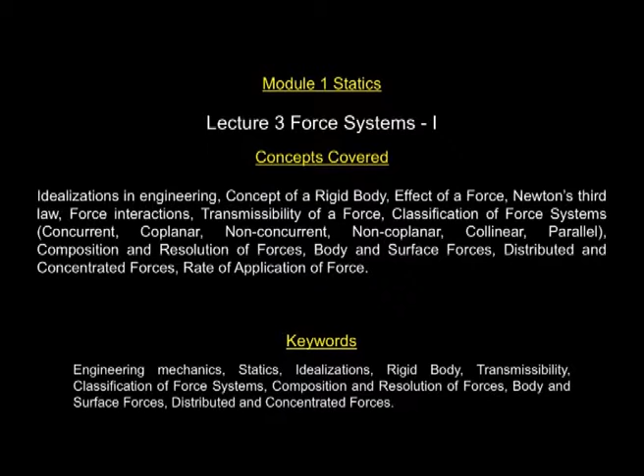So, let us get on to the main body of the course, and let me start with the first chapter on force systems.

Idealization is a crucial step in engineering approach for the purpose of analysis. Why do we do that? This is because actual behavior of systems are generally complex. Consideration of all features is difficult or impossible in many cases. So this is very important. You have to look at what is the phenomena you want to analyze. Depending on the context, you have to make an appropriate approximation.

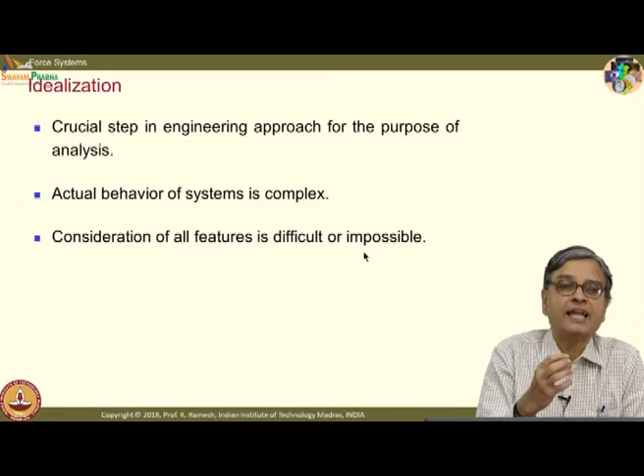So, when I have a physical system, I extract the essence of it by a mathematical model. And what is a mathematical model? We choose a mathematical model such that it is simple to analyze, yet exhibits the phenomena under consideration. So the challenge lies in how to arrive at a mathematical model for a given physical system, and how are you sure that whatever mathematical model I have taken is good enough for the given application?

The only way is you verify it based on experimentation. So experimentation is the ultimate key to verify a given mathematical model.

So you have to look at, all physical systems are generally nonlinear. We try to model it as linear for the purpose of analysis. Otherwise the problem becomes too complex to analyze.

See, if you look at cosmology, they assume that mass is uniformly distributed, whereas there is a large distance between earth and the moon, and earth and the sun, where nothing is available, yet you make an idealization that mass is uniformly distributed. This may be good to start with when you want to analyze certain aspects of cosmology.

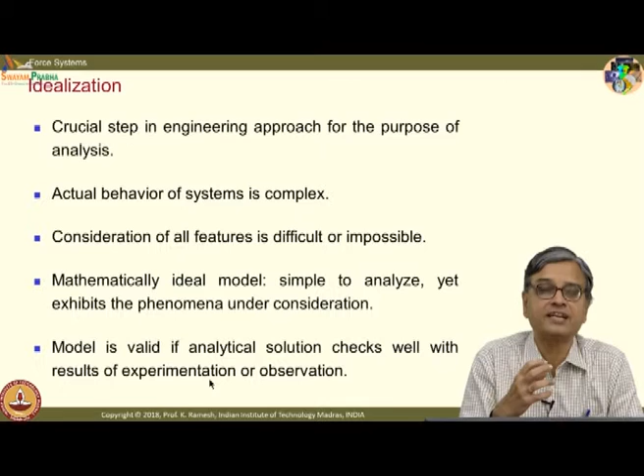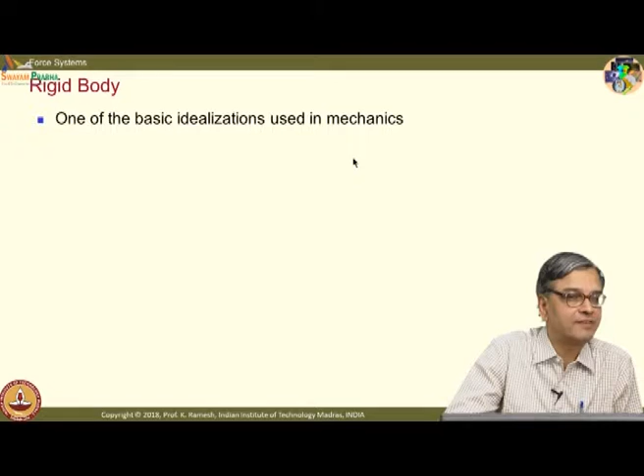One of the basic idealizations used in mechanics is to consider the body as rigid, and we have already seen in the previous class what is the actual definition of a rigid body. The definition says a rigid body is one in which all particles remain at fixed distances from each other, irrespective of the forces that act on the body. In essence, it does not deform under the action of forces.

Is it true? Not strictly true in many instances, but it is a very powerful idealization to get started. And fortunately, in this course, you will only come across rigid bodies. This idealization is used both in the study of statics as well as dynamics. And you cannot use this idealization indiscriminately, you have to be very careful.

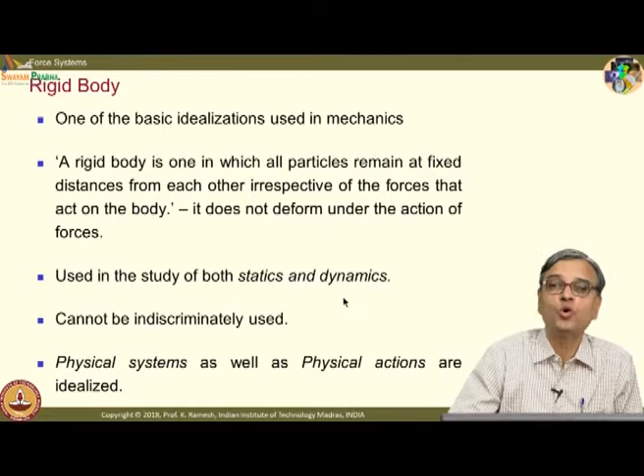And what you will have to notice is, we idealize physical systems as well as physical actions. When you say a body is rigid, you are idealizing the physical system.

And we will also represent a force by a simple vector indicating it is a concentrated force. Concentrated force is again an abstraction. It goes with rigid body idealization. You can't think of a concentrated force without assuming the body as rigid, because in reality all bodies deform. You will only have a distributed force whenever there is a force interaction. If you want to accommodate that in your analysis, you will take years to solve a problem, or for some instances you may not even have a first level solution.

And what is the concept of a force? You find a person pulling something in the field, and another, a footballer, is hitting the ball. So you have some kind of an interaction between the footballer's foot and the ball. Now we would like to do the analysis. How do I get started with the analysis? It is a very simple way of describing complex physical interactions between bodies. What happens physically? You model it as a force.

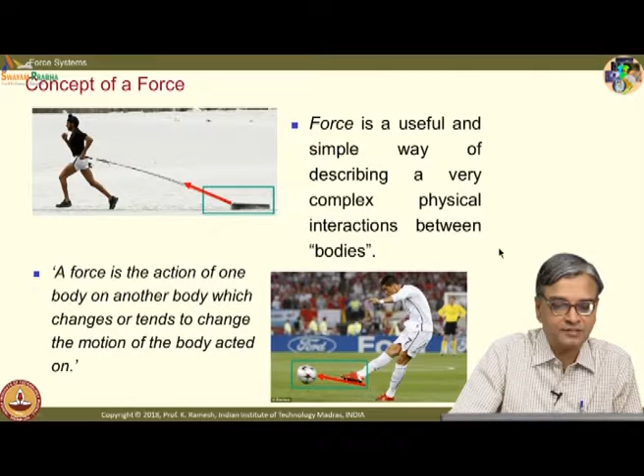What is force characterized by? Force is characterized by point of application. I have a generic body here, and I could have multiple points where there could be force. When I say a force, it is characterized by its magnitude as well as a direction.

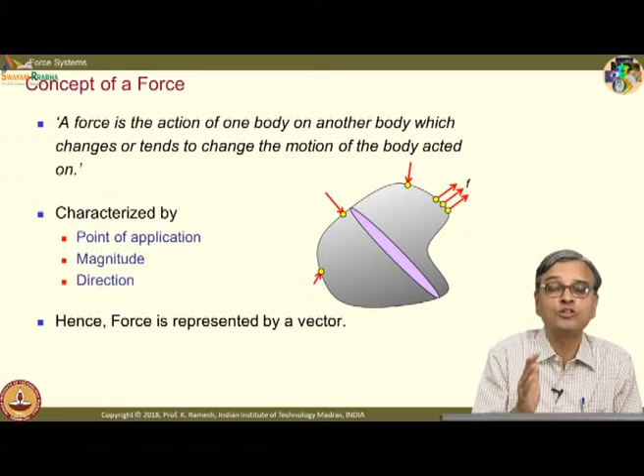So when you have a quantity which has a magnitude and direction, how will you label that? You can label that as a vector, provided it also satisfies the commutative law. If it does not satisfy the commutative law, it cannot become a vector. We will see later, finite rotation does not come under the purview of a vectorial quantity, whereas infinitesimal rotation can be shown as a vector quantity.

So I could represent the force by a line like this, showing the magnitude as well as the direction. It could be concentrated or a distributed force like this. In reality, whenever there is interaction of one body with another, it will always be distributed. But in many instances, to make our life simple, we indicate this by the resultant and show that as a concentrated force.

Concentrated force is also an abstraction, goes hand in hand with rigid body idealization.

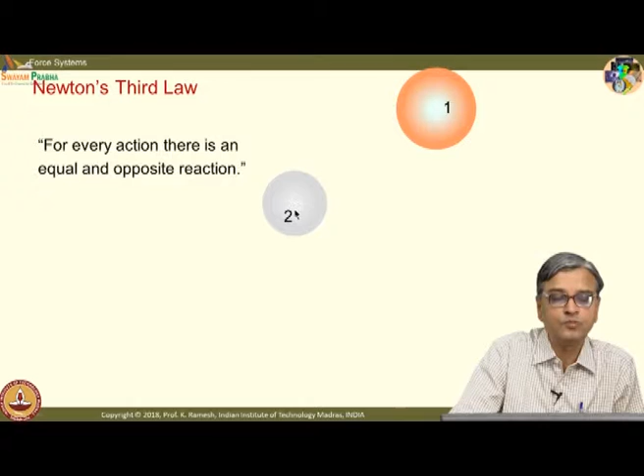From Newton's third law of motion, force always exists in pairs. I cannot have just one force indicated like this, for which I have to look at Newton's third law: for every action, there is an equal and opposite reaction. I have shown two bodies 1 and 2. Body 1 will exert a force on 2, body 2 will exert a force on 1, and I could show them as vectors like this, F12 and F21. So when I say force, it indicates this pair, and they are equal and opposite, very obvious.

And you should also remember and understand very clearly, action and reaction forces always act on different objects. They do not act on the same object.

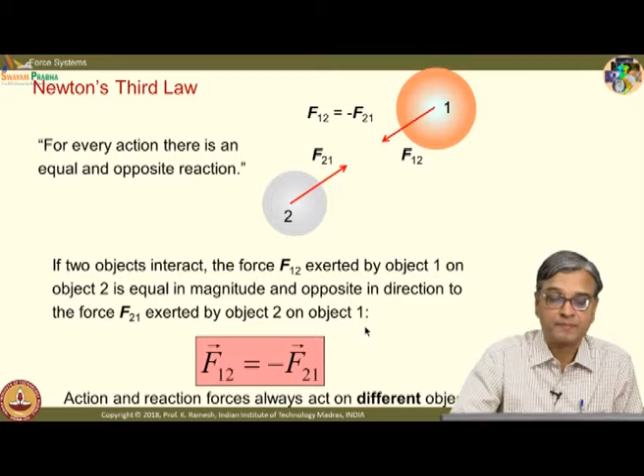What kind of force interactions can you come across? Interactions can be between systems in direct contact or those which are physically separated. So I have a rail wheel on rails, and there is direct physical contact between the wheel and the rail. How do I represent this interaction? I separate these two bodies and I have a force F1 acting on the wheel and F2 acting on the rails.

This is by direct contact. I would like you to make a sketch and then put it. These concepts will look very simple and too obvious, but your notes should be complete, because we have to build a strong foundation.

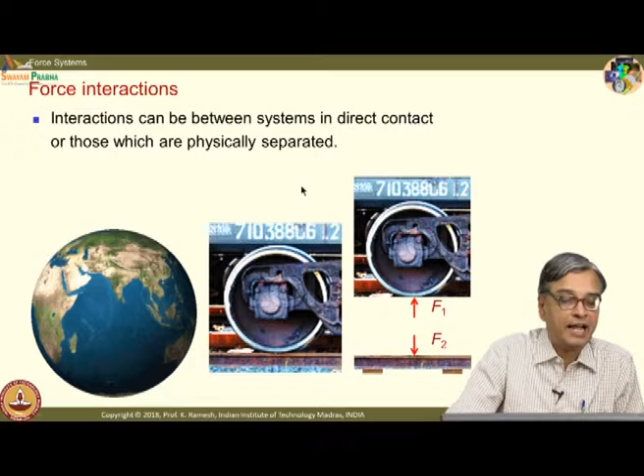I can also think of an airplane flying. It does have an interaction with the earth. There is no direct physical contact, and that is why gravitation was so difficult to comprehend. So whenever you are going to draw a free body diagram, you will have to look at forces that happen in direct contact and force interactions that act without direct contact. We would see them as surface forces and body forces.

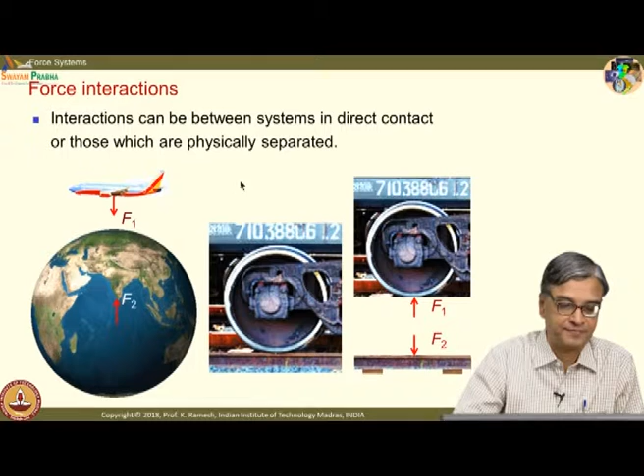It has become customary to apply the term force indiscriminately to either the pair F1, F2, or to the single vectors F1 or F2 separately. So both usages are seen, and we simply represent F1 as a force and be done with it.

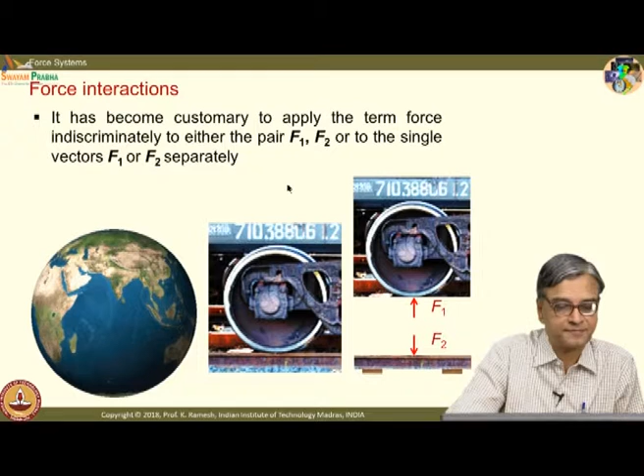And what is the effect of these forces? I have an ordinary screen and I draw a line as a vector. I have not shown what would happen to the body. Suppose I use the facilities of animation and try to show you, if I put a force on a body, what would happen to it? We would see that in the next slide.

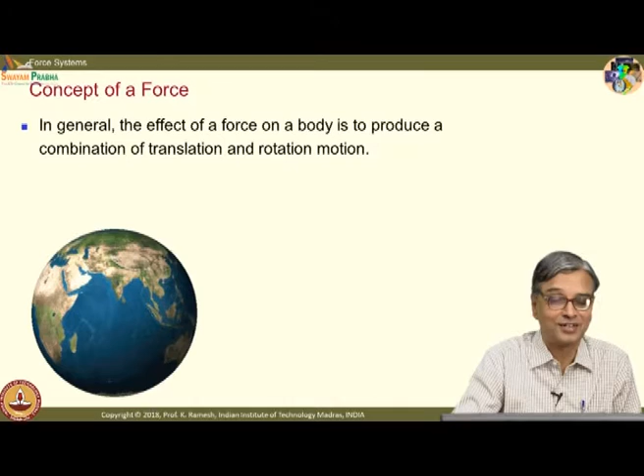I have a force F2 acting on this. What would happen to this? It would translate. You don't have a smart screen which understands mechanics, where when you make a drawing and put a force, it shows the motion. Some of you should develop that for Google, because they are making new developments with artificial intelligence. You could also make a smart screen which understands mechanics.

Unless this force is resisted by the supports which develop reactions R1 and R2, the rails will not remain in that place. So in general, the effect of a force on a body is to produce a combination of translation and rotation motion.

Here I have cleverly taken an example where this force F2 passes through the center of gravity of the object. So when I apply the force, it has only linear translation, and you could feel this force if somebody pushes you, depending on where he puts his hand on your chest. If it is at the center, you will translate. If it is on one of the edges, you would translate as well as tend to rotate, but you might resist and then stand, that is a different issue. But if you allow yourself to be acted on by the force, you should feel that any force acting on a body in general produces a translation and a rotation.

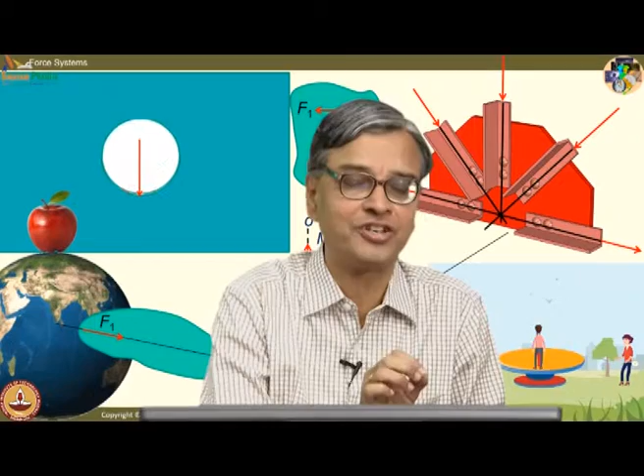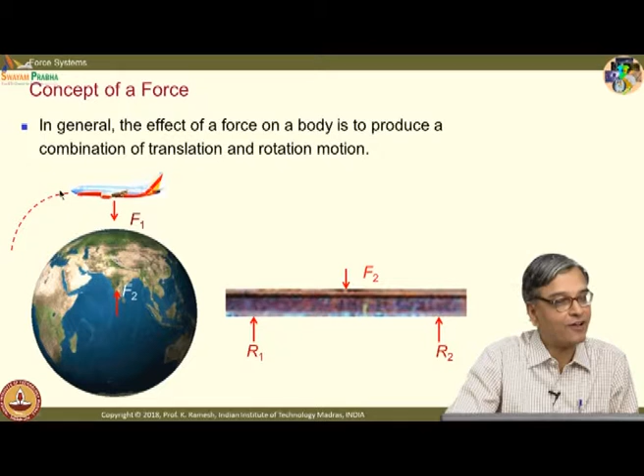In exceptional cases, you may have only rotation or you may have only translation, but the generic effect is a combination of translation and rotation. And in the case of an aircraft, what happens? Unless the earth exerts a force, the aircraft would fly off from the earth. So it follows a particular trajectory.

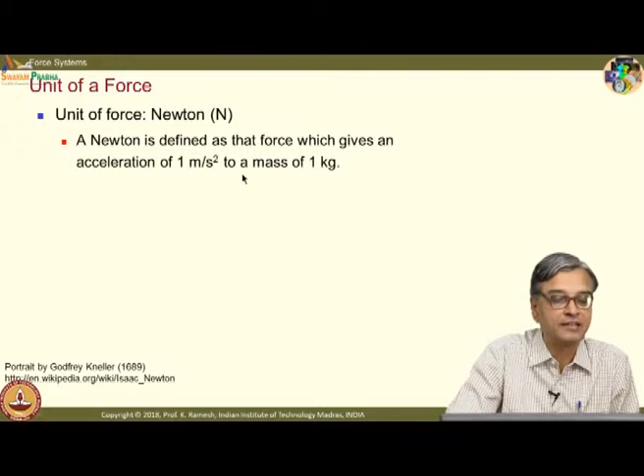Let us also understand what is the unit of a force. The unit of force is given the name in honor of Newton, you call it a Newton. A Newton is defined as the force which gives an acceleration of 1 meter per second squared to a mass of 1 kilogram. And it is a very nice portrait of Newton drawn in 1689.

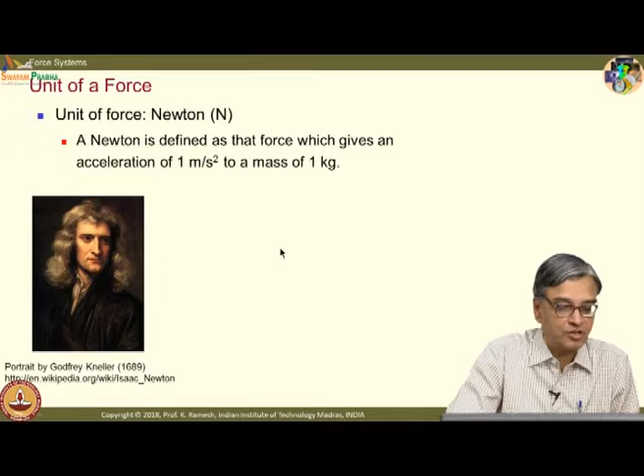We have already learned something about Newton. We have some more data. He is an English physicist, mathematician, astronomer, philosopher and theologian. I also find these dates are different - if you go to history, scientific historians find some dispute on some of these dates. In the earlier slide I had this as 1642, it shows as 1643. Undoubtedly, he was one of the most influential scientists and people in human history. His work laid the foundation of most of classical mechanics, and he also built the first practical telescope.

Observations are very, very important. That is what I said. You have a mathematical model - how do you verify the mathematical model? Only based on experimentation. And in those days, their first choice was to look at stars and find out, predict their orbits, and then verify their understanding of mechanics.

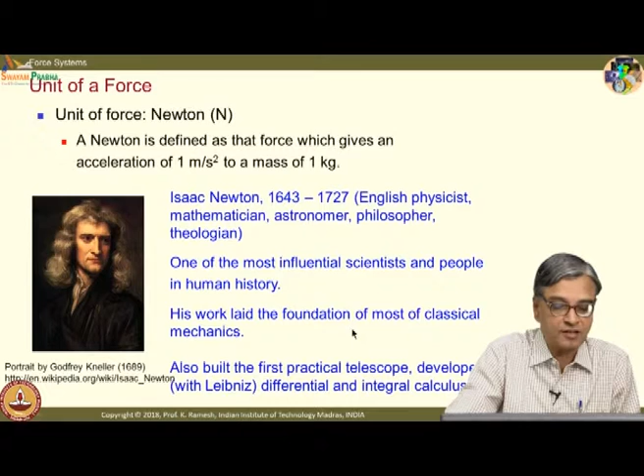And he is also credited with developing differential and integral calculus along with Leibniz. And another subtle concept of force is transmissibility of force,

which we will be repeatedly using in this course. There is a justification. The principle of transmissibility states that the external effects of the force are independent of the point of application of the force along its line of action. What you have to pay attention to is external effects - we are not talking about internal effects. Internal effects would be different, but external effects remain unaltered if I move the force along the line of action.

And I have a nice animation to show this. I have a force acting on this body. Now I make the body smart, so it understands mechanics. Because of the force, the body will not remain at rest, it will move, and I have taken a snapshot up to this point. Now what I do is move this force to the rear of the body, which I can do easily, and look at what will happen to this body. When I apply the force, what will happen? This body also will move forward.

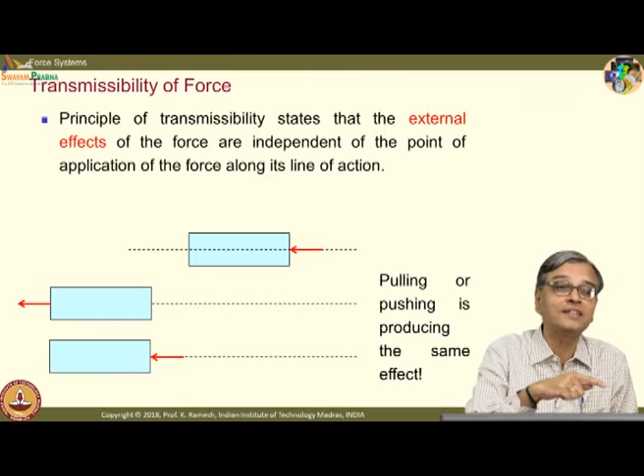Now let us look at what kind of internal effect is possible. Now I do not have one force, but another force to balance it, and this is like pulling the body, so the body is under tension. If I move them along the line of action, what happens? The body is under compression, and in both instances what happens? The object is at rest - that is the external effect.

We have taken the body to be rigid, so the distance between the particles do not vary. In one case I apply tension, in another case I apply compression - the external effect is the same.

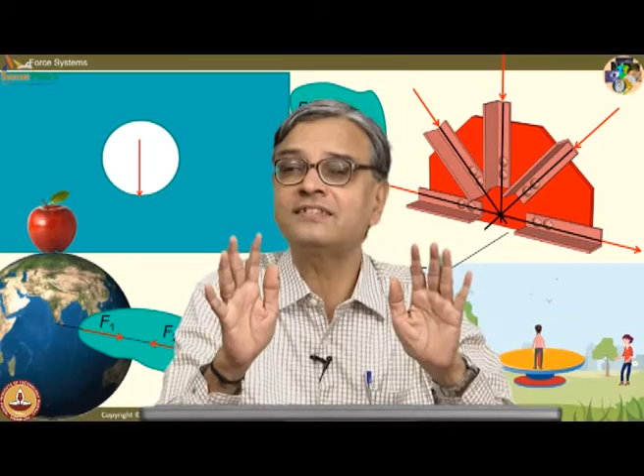Suppose I make the body deformable and visualize what could happen. A rigid body will remain like this. If the body is deformable, you will find when I apply tension, it will elongate like this. When I apply compression, it would get compressed from its original dimensions. Even though the internal effect is different, the shape of a rigid body will not change by definition.

Look at the word definition - in physical reality, it does happen, it does change shape, maybe minutely. If you use very high magnification, you will see. If my interest is to find out the external forces, this approximation is a convenient way to carry on with the analysis.

And we have also seen that force is a sliding vector that should be used with care - that is what is emphasized - and it slides along the line of action. That is what you see here.

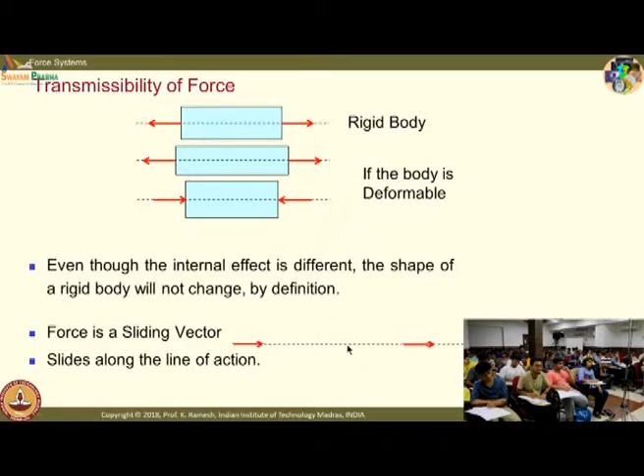Force is a vector, but we also qualify that force is a sliding vector, and this has to be used judiciously when you are looking at the external effects of the force. So what you learn is force is a sliding vector.

What are the classification of force systems? If you understand different force systems, then you can easily find out the resultant based on its properties.

One of the simplest force systems you can think of is a concurrent force system. Action lines of all these forces meet at a point.

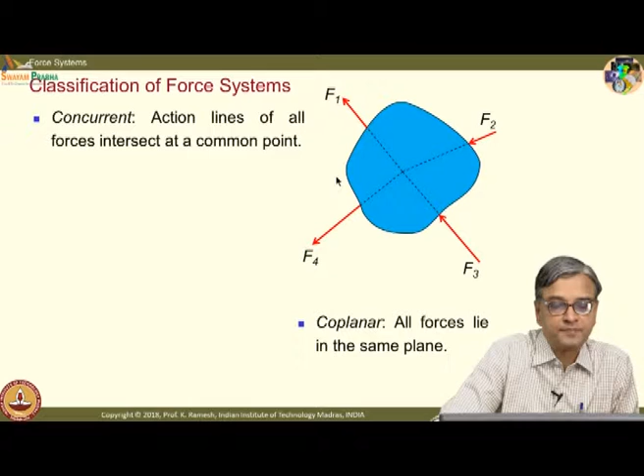I would in addition also have a moment, which we do not want to have. It is very clear from this diagram, you can also have a system which is concurrent as well as coplanar. All forces lie in the same plane, which you could see very easily in the case of a gusset plate.

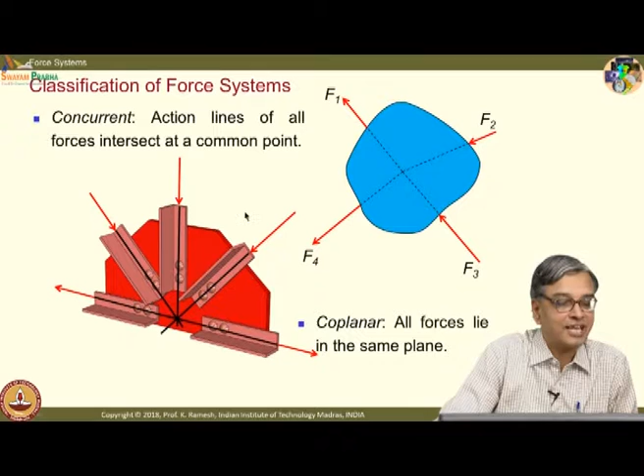Make a neat sketch on this. If you are in the first semester and exposed to engineering drawing, one of the first trainings you are given is how to sketch. You may not become an artist, but you should know how to sketch physical systems from an engineering perspective. This is an isometric view of the system for you to get the details. Try your hand on it to the extent possible.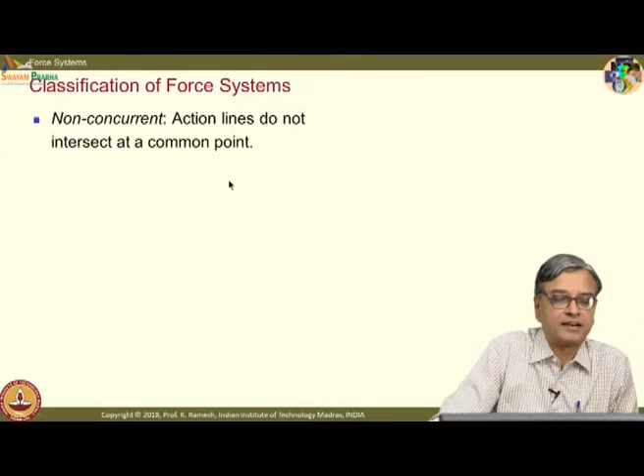Then I can also have a system which is in general non-concurrent. Action lines do not intersect at a common point. I have a tall mast, and you find a line connecting this, called a guy wire. If you look at any transmitting tower, for example a radio transmitting tower, it will be a thin column and they will anchor it in its place by steel wires, called guy wires, to take care of the wind loads, and the tension would be adjusted by a turnbuckle at one of the ends.

This is a system which has forces acting on the guy wire, there is a weight acting on this. They do not meet at a point, they are very general. I have also replaced the kind of interaction by a system of forces.

Soon we will learn how to idealize supports. Focus now here is, we have idealized the body as rigid, then we are trying to understand different force systems. In the process, I show you certain idealizations indirectly, but we will also have a formal discussion on how do I idealize a wire connected to a structure, or how do I analyze a fixed end, that we would see sooner.

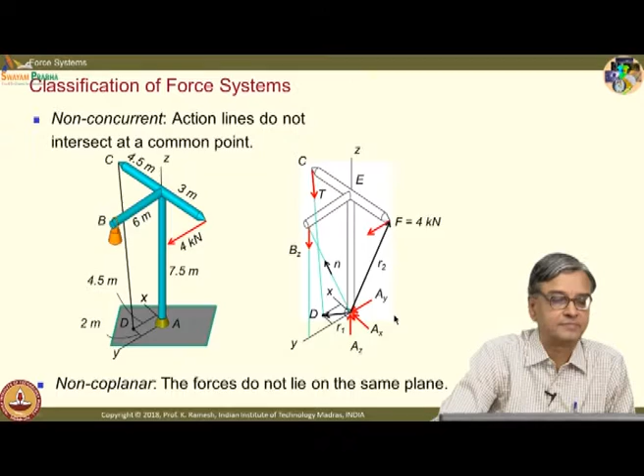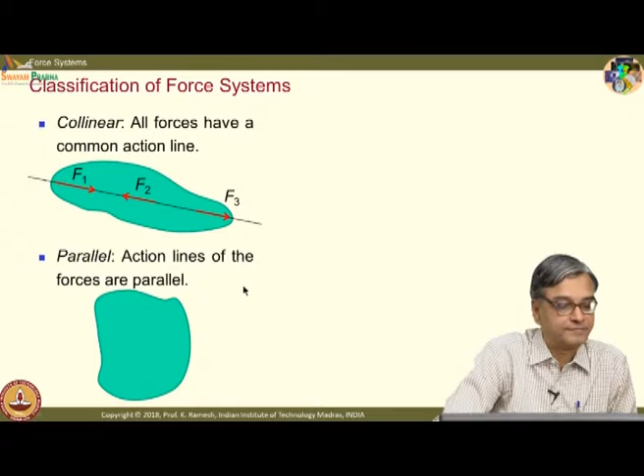I could also have another force system where action lines of the forces are parallel. You may ask where this kind of force system can come into play. I have a simple example.

I have a member with rollers on two ends on a floor. I have a pin joint here and a wire connected to this, a sort of rope, and I go and pull the rope. That is what I am going to do. When I pull the rope, I would draw the free body diagram of this member. This roller is lifted from the floor, this roller interacts with the floor, that interaction is replaced by a concentrated force, and the interaction of the rope is put as a force like this, and weight of the object is acting downwards like this. This forms a parallel force system.

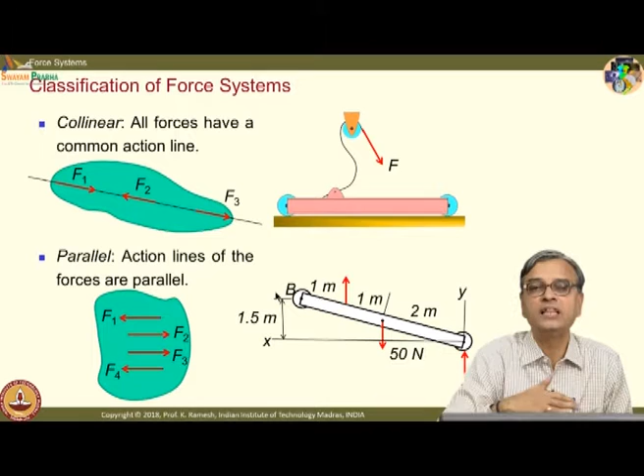So you could have in applications systems having parallel forces, collinear forces, concurrent forces and non-concurrent forces. They can be coplanar or non-coplanar. All these combinations are possible.

Once we have looked at the force system, we would like to simplify them. The process of reducing a force system to an equivalent and simplest force system which has the same external effect - that is what you have to underline. We are only looking at external effects on the body, as the original force system is called composition. For us to do this, we would use the property of the force.

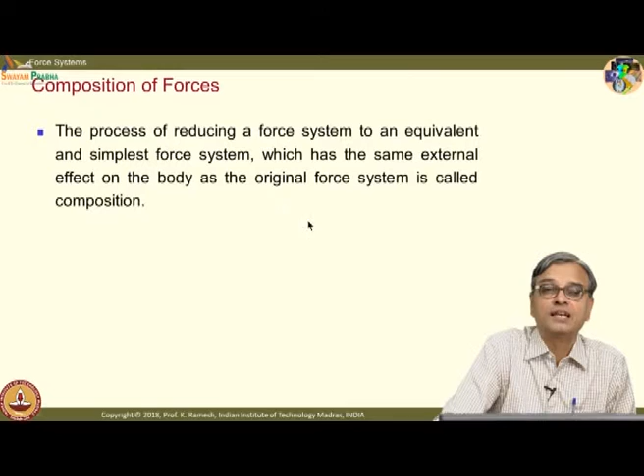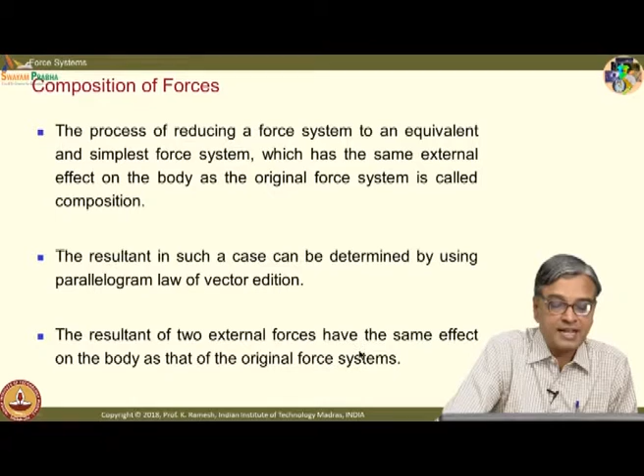We have seen transmissibility of a force. Once I move the force to a convenient point, I could find the resultant by using parallelogram law of vector addition. The resultant of two external forces has the same effect on the body as the original force system. That is a key point.

When I have multiple force interactions, reducing local interactions by a simpler force system is desirable to analyze the body. For me to reduce that, I use the concept of composition of forces, which you all know indirectly from your earlier learning. We are only revisiting the same old concept so that you do not make a mistake in future.

I can have a body like this, with forces F1 and F2 acting on it, and we have also shown the line of action. These two lines of action intersect at point P, and if I have to find out the resultant, it is easier for me to move these forces to point P. I use the concept of transmissibility of force and then take the resultant.

This is very simple, something you have done many times in your earlier learning, but it is better to recollect that you are able to do this because you are looking at external effects, number one, and you are employing the property of transmissibility of force. You may not have paid attention to transmissibility of force in your earlier learning - by rote practice you would simply move and then take a resultant. Now you have a principle behind that.

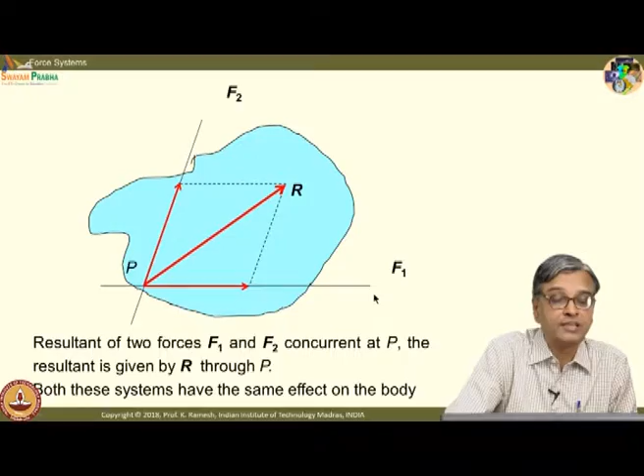Once you have looked at composition, you should also look at resolution of forces, because we need both tricks. Depending on what is the problem on hand, I would do resolution or I will do composition. Resolution is the reverse of composition, so I get the force into its components.

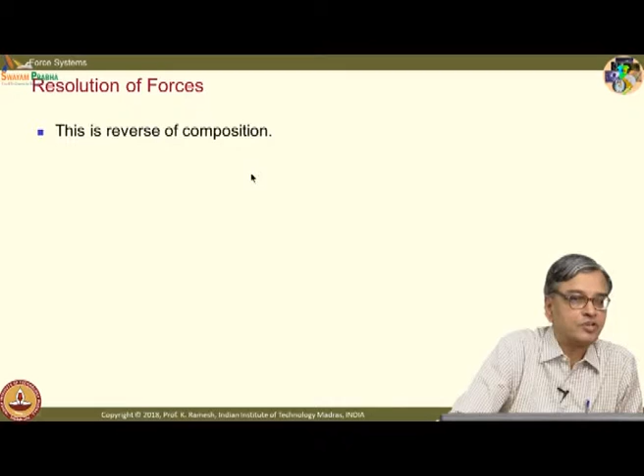The process of finding two components of a force which will have the same external effect on a body as the force itself is known as resolution of a force. Here I have put two components because it is easy to look at two-dimensional analysis first. If I do a three-dimensional analysis, then I should get three components. It is useful in the study of mechanics.

While dealing with Cartesian coordinates, the most common two-dimensional resolution of a force is the resolution into rectangular components in x and y axis. You have different coordinate systems - polar coordinate system, NT coordinate system. So depending on which coordinate system you are looking at, we would like to see the components, and that is known as resolution of forces.

I have taken a Cartesian coordinate system, I have a force F - all this is very well known to you, but for the purpose of completeness, let me list out the steps. It is oriented at angle theta - more of a recollection of your early learning.

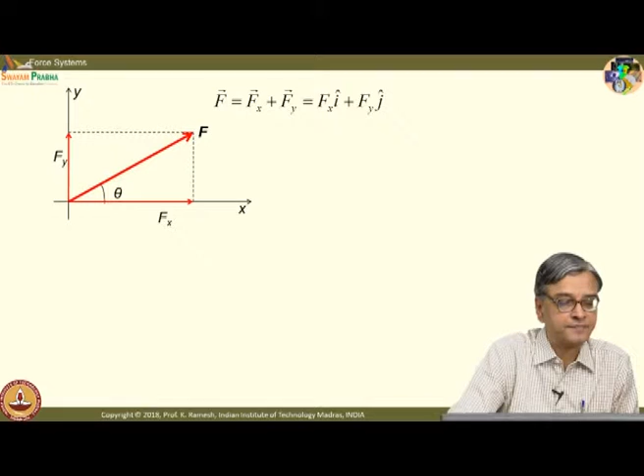I could write the force in terms of the x component and y component: Fx i and Fy j, where i and j are the unit vectors in these directions. So I have this force with magnitude Fx and Fy. Then I can write many of these.

What is Fx? Fx is nothing but F cos theta, and tan theta is Fy by Fx. What is the magnitude of the force? What are the direction cosines of this force? I can put them as L, M and N. What is the unit vector representing the force? I could put that as Ef = Li plus Mj plus Nk. All this is taught to you earlier - we are just having a recapitulation.

I had told you earlier, you have forces that happen when two bodies interact directly, and there are also forces that act at a distance. We could classify them as body and surface forces. So what are body forces and what are surface forces?

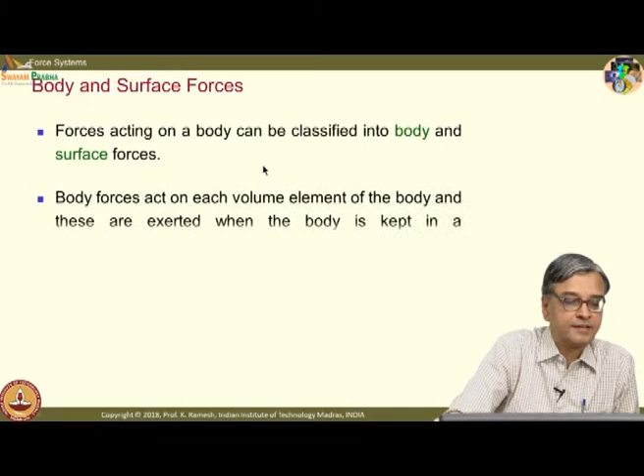By definition, body forces act on each volume element of the body. One of the commonest examples of body force is the force due to gravitation, which you call weight. This interaction could also come from other sources, like magnetic field, electric field, or even centrifugal field. One very important aspect when we draw the free body diagram later is that you must consciously account for the body force interaction. There could be mistakes if you do not accommodate this, because there is no direct physical contact.

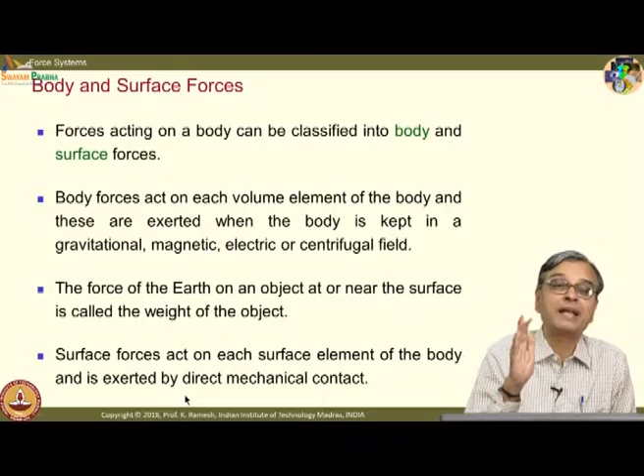This is what is explained here: the force of earth on an object at or near the surface is called the weight of the object. On the other hand, surface forces act on each surface element of the body and are exerted by direct mechanical contact. So when you draw the free body diagram, by definition you cut from the surroundings and replace the interaction with the surroundings by forces. You will normally not miss the surface forces, but body forces you may miss.

Cleverly, in many engineering applications involving mechanical and aerospace, the effect of weight is usually neglected to make our life simple. On the other hand, if I have to analyze a civil structure, for example a beam, it is so heavy that I cannot neglect the weight of the beam in analysis of civil structures. So what we do is idealizations very cleverly to make our life simple, and mind you, the solution you get is not exact, it is always approximate, good enough for a given application. That is the way you have to look at it.

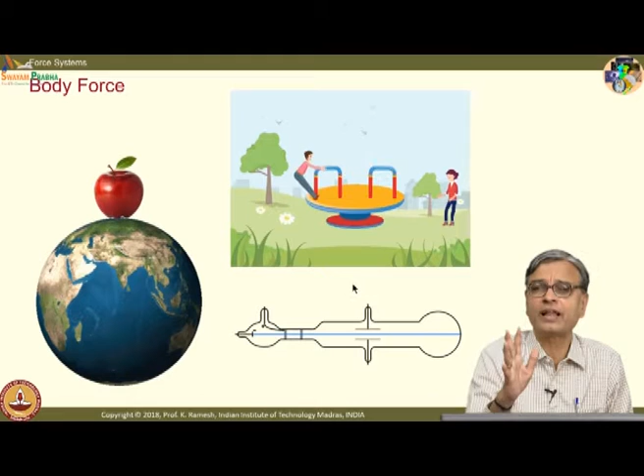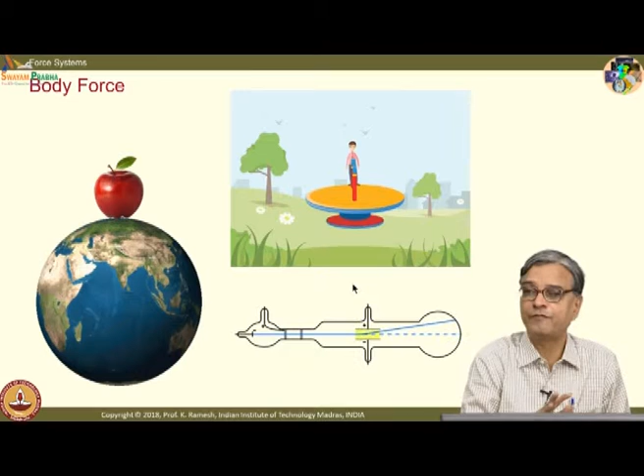One of the body forces you can think of is the attraction of gravity, like the apple falling. There is also electrical charge, where the electron beam gets deflected depending on the charge - that is again a body force. And we have already seen a rotating platform: when you sit and enjoy the merry-go-round, you do feel the force of centrifugal effect, and they are all body forces. Particularly when analyzing a turbine blade rotating at a very high speed, you have to take into account the effect of centrifugal effects in your analysis. If you do not do that, your results will be far away from your experimentation.

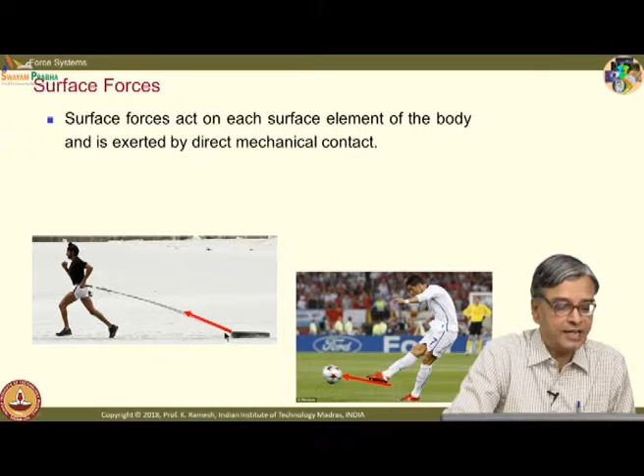When we go to surface forces, the direct mechanical contact is very clear. We will also look at distributed forces - I said all bodies are deformable. In general, any force interaction is only a distribution. But there are also instances where we had seen a parallel force system, so we have to find out the composition of it.

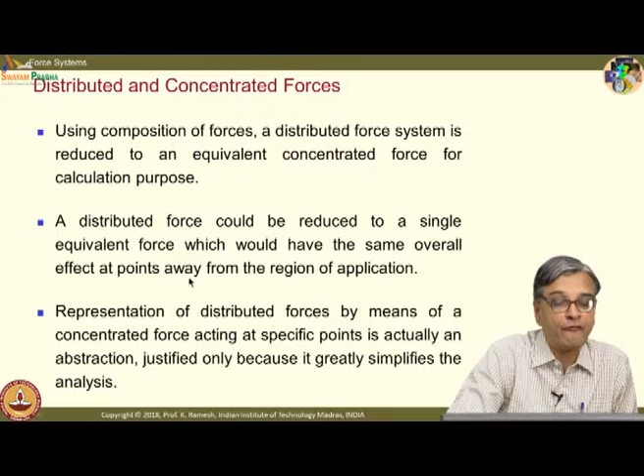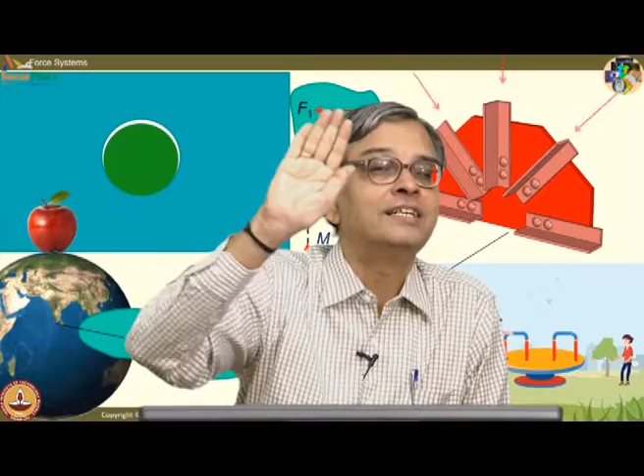That is what we will look at now. A distributed force could be reduced to a single equivalent force, which would have the same overall effect at points away from the region of application. This is something engineers use - you have to keep note of it. When the body deforms, what happens physically at the actual interaction can be different from what happens in your mathematical model. Leaving those points of application, away from the point of application, if the force system is statically equivalent, it will have the same external effect. That is very, very important.

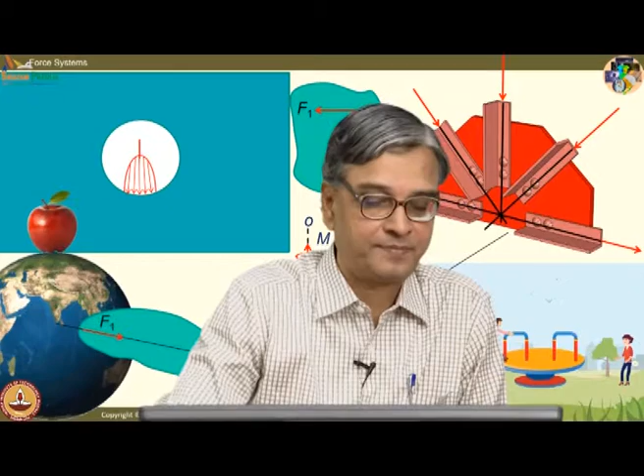Representation of distributed forces by means of a concentrated force acting at specific points is actually an abstraction, justified only because it greatly simplifies the analysis.

I have an example which shows a cantilever beam. I am also using engineering terminologies - the idea is when we take up beams, you understand what a cantilever is. It is better to get those jargons to start with. One simple representation is that this cantilever is subjected to a concentrated force at the end. How do I get this concentrated force physically? There could be multiple ways to exert this force. It is a very nice example which brings into focus how to comprehend a physical system fit enough for analysis.

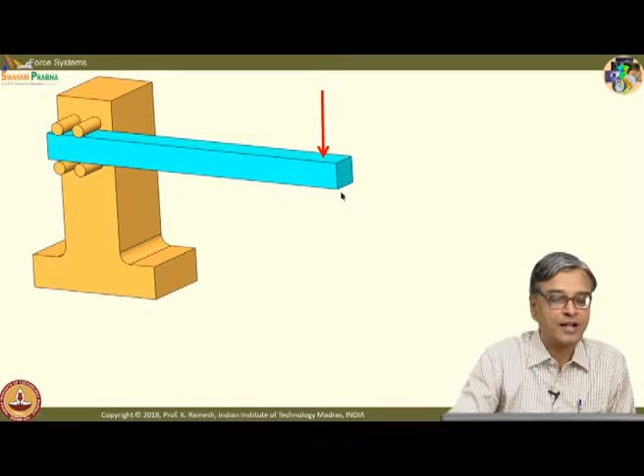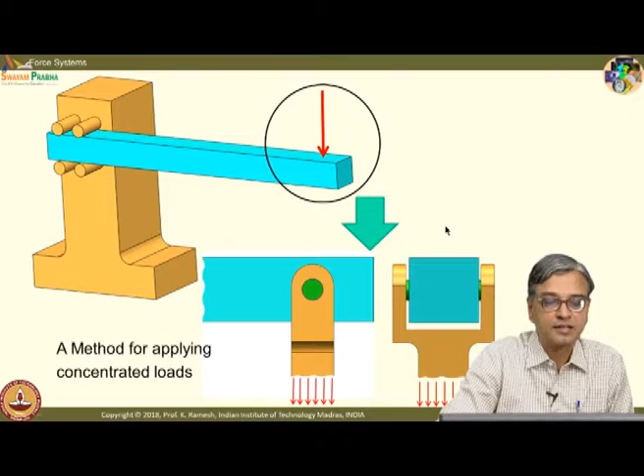One of the ways of applying this force could be: I could have a pin inserted into a hole at this point. I look at the front view here, I look at the side view - I have a pin running through the hole, I have a fork. On the fork I could have a weighing pan and put some weight there. If I analyze only the fork, I could replace this as a uniformly distributed force, and I would have the interaction of a pin with the hole on this member. Let me show this. What I would do is pass an imaginary plane that cuts across this member. What way would I see the interaction between the pin and the hole?

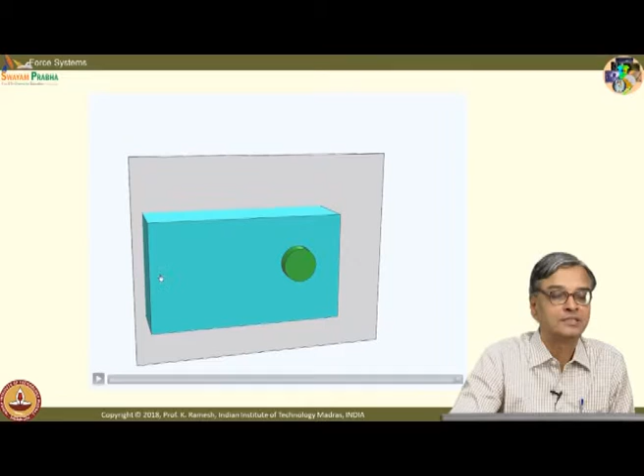I would have a clearance which is not visible in a small diagram, so I will magnify it. I have a clearance, and the pin would be resting on the hole like this.

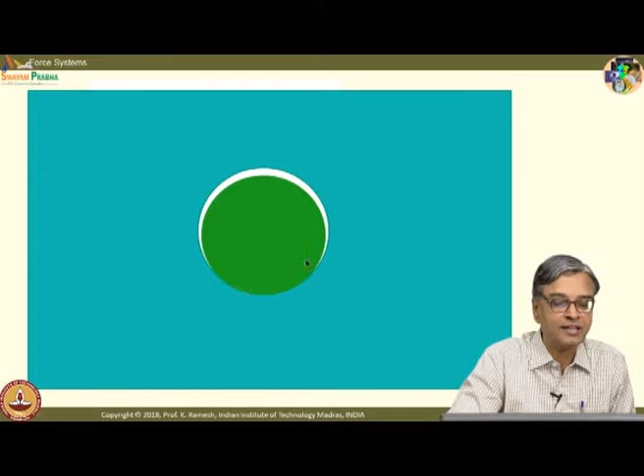If you really look at the kind of interaction here, the force would be distributed. If you go for higher studies, you will learn what is known as contact stress, which also specifies what kind of distribution is there. This distribution is elliptical, and you idealize this as a Hertzian contact. I would in fact have a distribution like this.

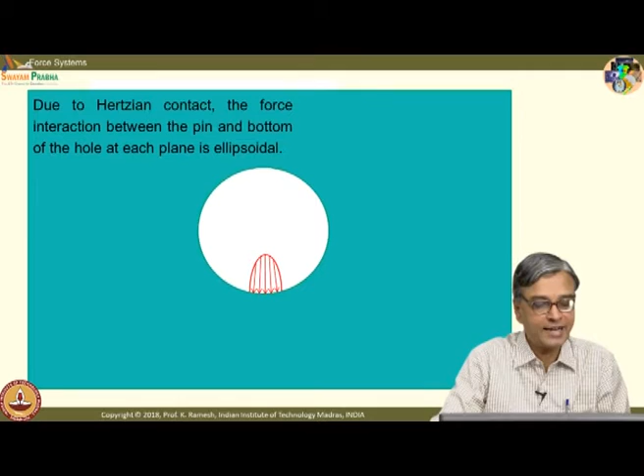Imagine if I have a body which has interaction with its surroundings, each one of these interactions is so complex. If I want to retain all of them and try to do the analysis, it will be too difficult to handle. I would in fact replace this by a simpler force system, by a concentrated force. I can find out the resultant, I simply replace it as a concentrated force.

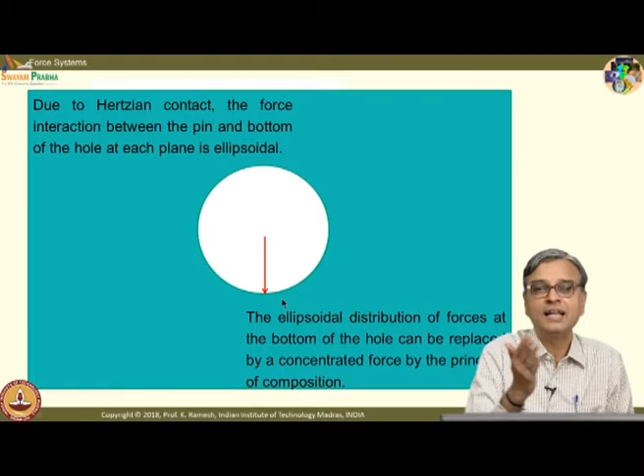We have already seen, I have put an imaginary plane passing through the member, and I have looked at what happens at that plane. Physically, the pin is occupying a finite distance, so the same thing would get replicated at each one of the planes. Let us see how it happens.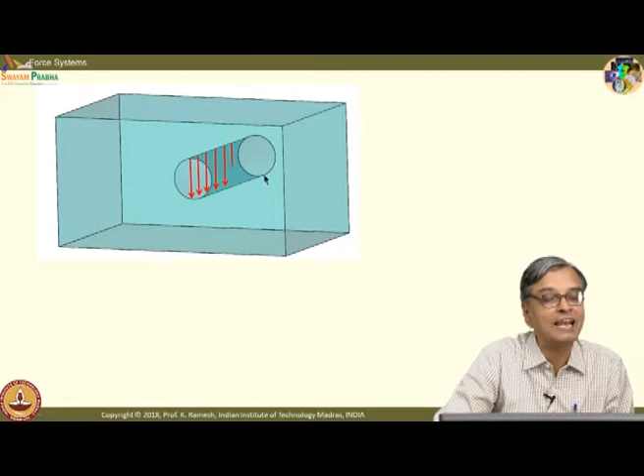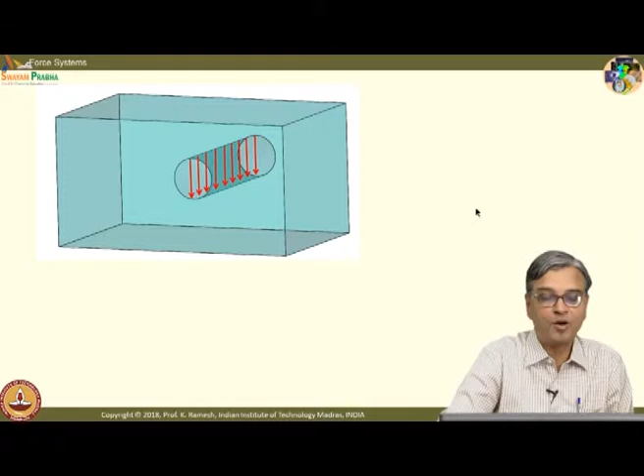So I have shown it like this. When I replicate that, I would have a parallel force system existing between the pin and the hole. By composition, I can replace the parallel force by its resultant, and by the concept of transmissibility of force, I can move this force to this end.

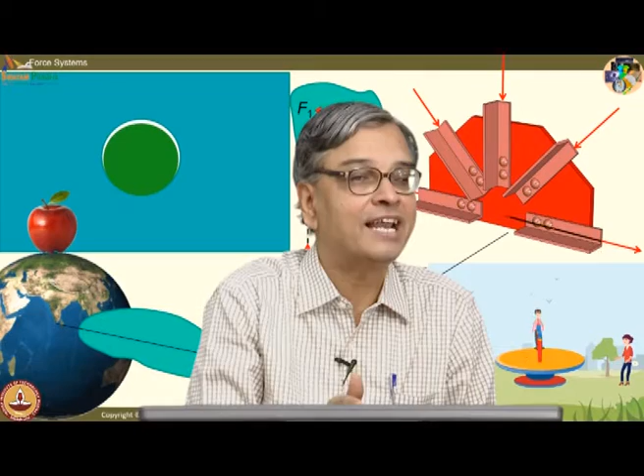So what you are seeing is, in a simple picture, you put a concentrated load, but it is not actually that simple. If you really look at the physical equivalence of it, many interactions are simplified, and you have used the concept of transmissibility of force, composition of force, and then replaced it by a single concentrated force to represent this complex interaction.

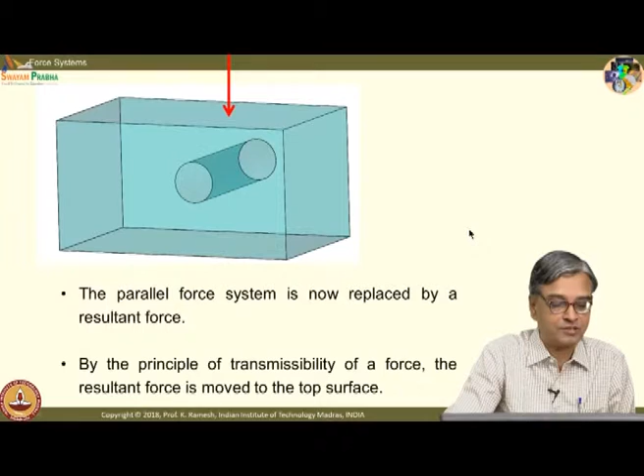We have now looked at the surface force; we would also look at the body force. By definition, gravity acts on every volume element of the body, and that is where you find the mass center and then replace it by the weight.

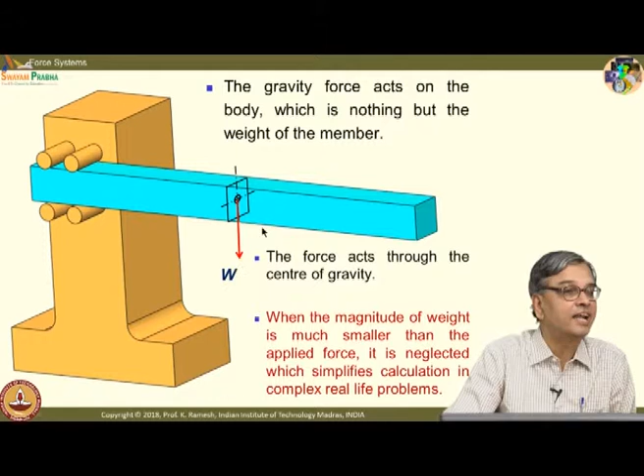And you have to see it with caution. When the magnitude of weight is much smaller than the applied force, it is neglected, which simplifies calculation in complex real life problems, which we usually do in many mechanical and aerospace systems, not in civil engineering.

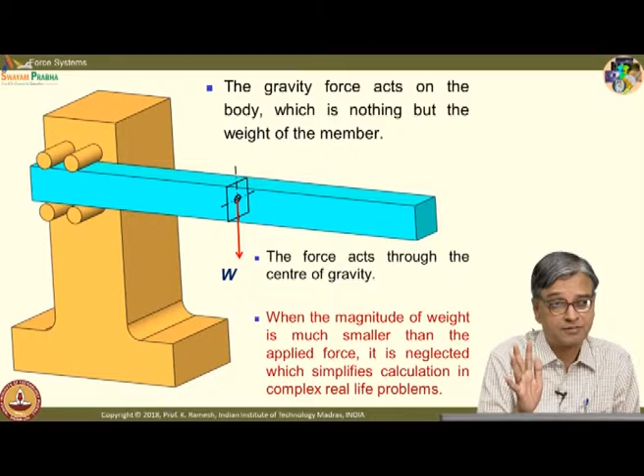We will also see one more concept. We have been looking at an apple falling, and we also show forces which have a magnitude represented by the length of the vector. How are these forces applied? It is a very, very important aspect.

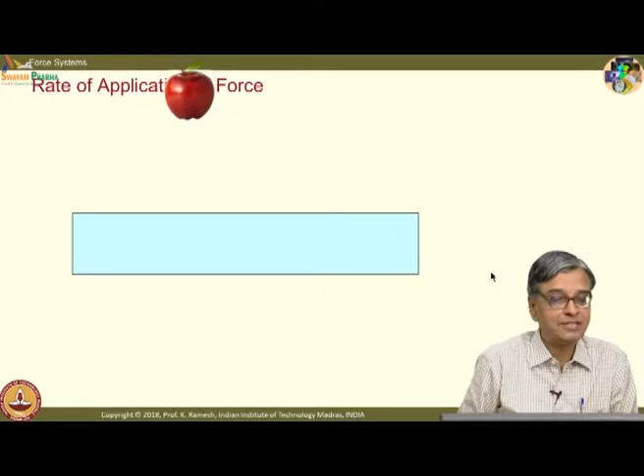If the apple is falling like this, we are not going to analyze it in our course, because what happens is at time t0 there was no force, and at time t just after that you have a full magnitude of force. We are not going to analyze such problems.

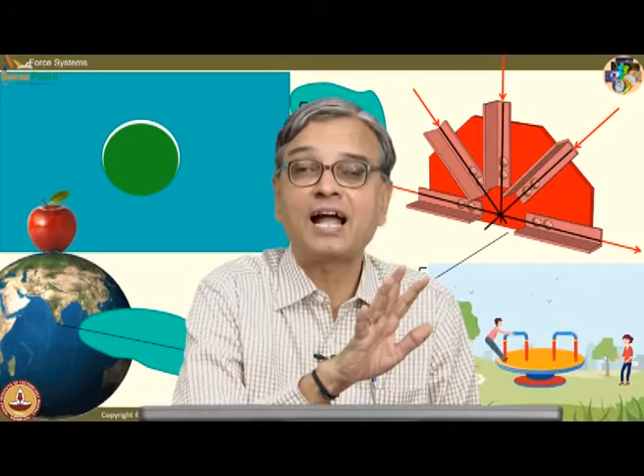Whenever we say that there is a force, we always perceive that the force has been applied gradually. So in this course, unless otherwise stated, the forces are assumed to be applied gradually for mathematical analysis. If I have a force which has an impact, the approach has to be different.

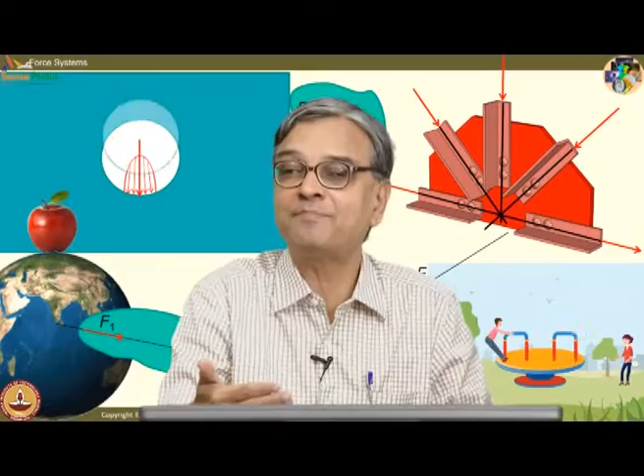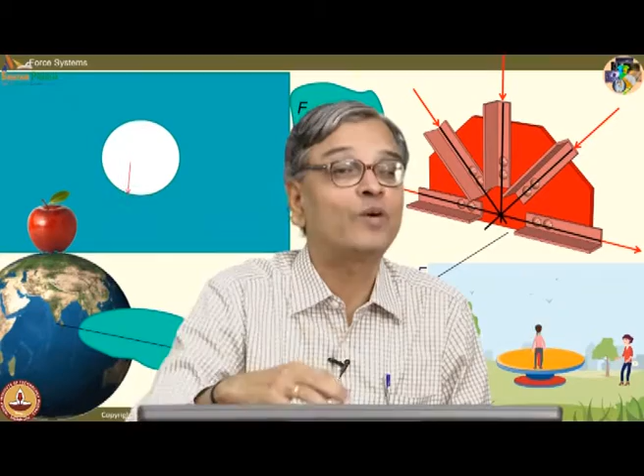For convenience, we show that as a vector, keeping our eyes closed as to how these forces are actually applied. I had shown a nice example: when there is a concentrated force on a cantilever, it is not that simple. Physical appreciation of this requires multiple elements, multiple force interactions, and bodies are also deformable. We make it rigid for analysis purposes, reduce the force into a concentrated force, and do the analysis of the problem.

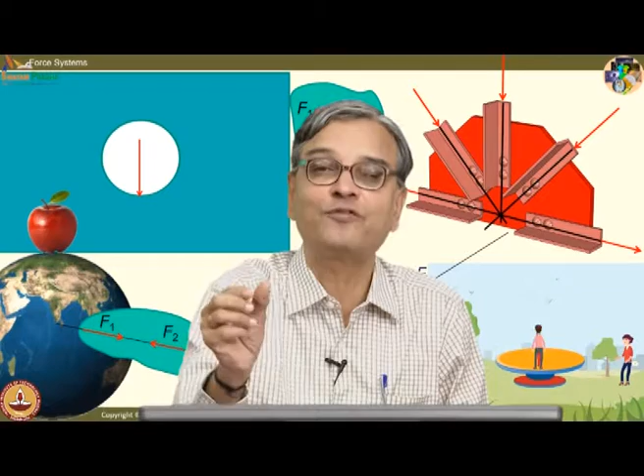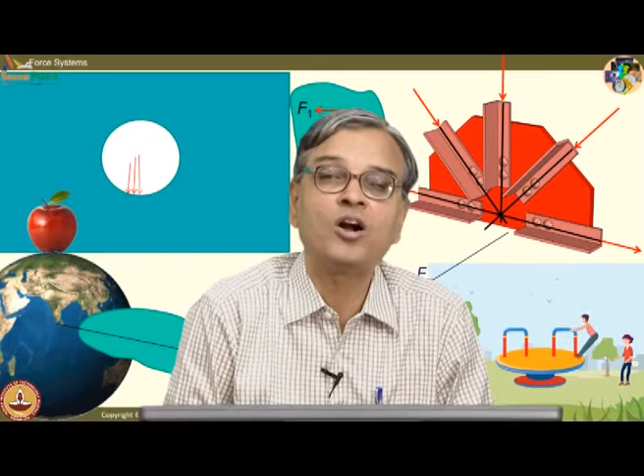So in this class, we have looked at, in broad perspective, what is the concept of a force, and we have learnt transmissibility of force. We have also looked at force as a sliding vector, and we said that we would idealize the physical interaction, the physical body, as rigid for the purpose of analysis.

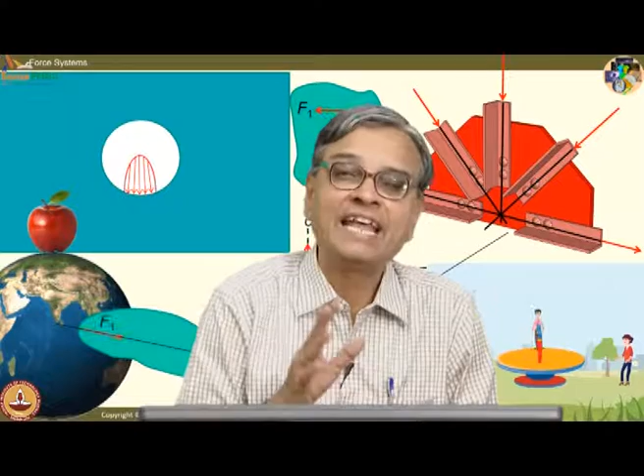I also pointed out that a good engineer makes very intelligent approximations. Without approximations, there is no engineering. You are a good engineer if you are able to solve a practical problem with the essential features necessary for the given application. Thank you.